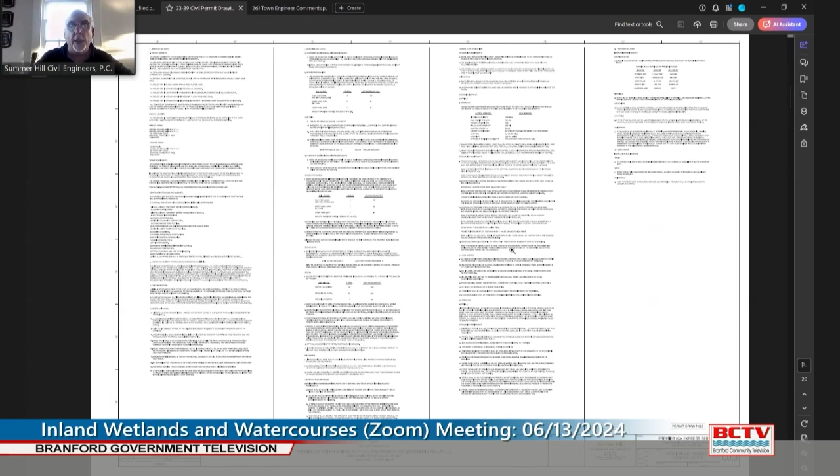Okay, so there are two changes to the plans. I'm going to zoom in a bit here. And both have to do with the stormwater infiltration systems.

Regarding the two stormwater treatment structures, one here and one here, we received information from the manufacturer that we had requested, and we simply changed the model number of the stormwater treatment structure, same manufacturer, same type. We just changed the model number on the drawings and the appropriate detail to make sure it had the correct internal capacity to bypass flows greater than the water quality flow. So the only changes are the model number and the detail shown on the drawings. The detail looks exactly the same, just different dimensions, a different model number.

The other change, and this is more significant, is that we did a couple things. We moved both stormwater infiltration systems further back away from the wetland, more towards Route 95. We did that as I was reading the new stormwater quality manual and noticed they had a requirement, or guidance, that stormwater infiltration systems should be a minimum of 50 feet from an inland wetland.

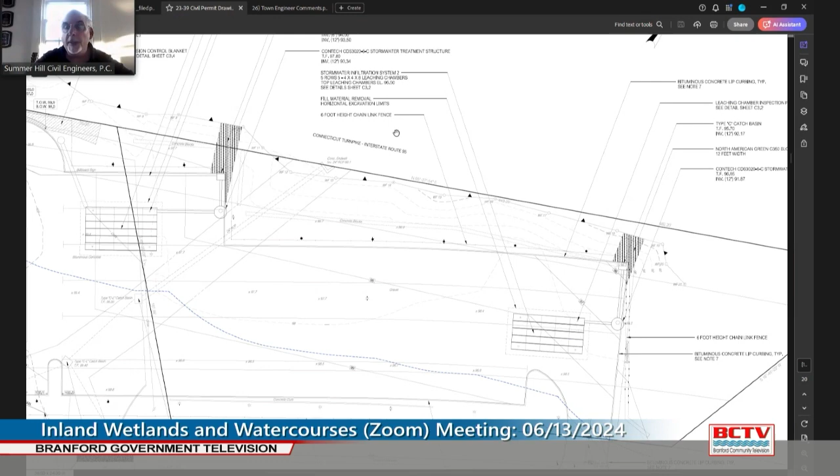So we did that. And the other probably most important thing we did is we called for, on the plans, removal of the fill material. If you recall, this site has been historically filled. We decided to call for the removal of the fill material within the limits of the stormwater infiltration systems, and the replacement of that fill material with a granular material that meets a certain infiltration rate.

And on our drawings, in the details, I'll see if I can switch to that sheet. Hopefully you'll be able to see the switch. Can the commission see now on my screen a typical section through the stormwater infiltration system? Yes, thank you. So we called for, on the plans, both in plan view and here in the details...

...the removal of the fill material, as observed by the project engineer in the field, and the replacement of it with the proper material, and the field testing of the in-place material by a specified infiltration test method to ensure that after placement of the fill, we have achieved the design infiltration rate for the systems. That applies to both infiltration systems.

So those... Excuse the interruption. This is Commissioner Bassermann. Is that because of recent changes in the stormwater manual guidance, or is there some other reason? Because for some time now we've talked about that broken up concrete, etc., as not being a problem.

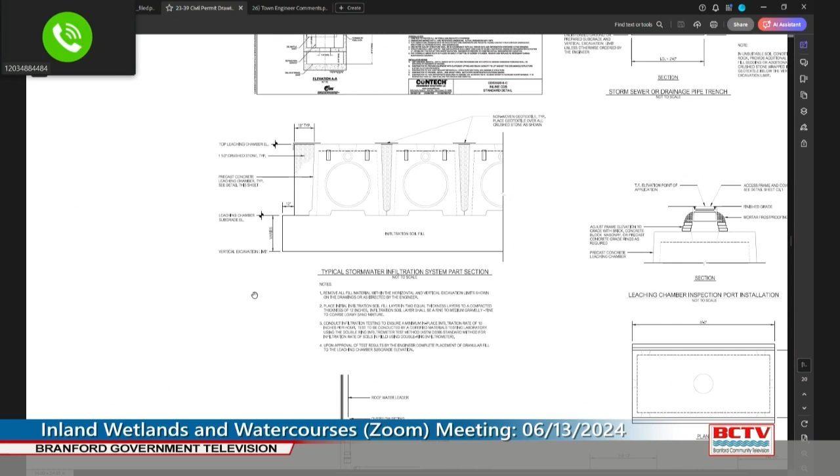So all of this removal would be observed, of course, by town staff, but it'll certainly be observed by the project engineer, and also the placement and the infiltration testing will be observed by the project engineer. We called for the infiltration testing to be done by a certified materials testing laboratory, in other words, an independent laboratory would perform the field infiltration test. You can see that note 3 here, which I zoomed in on.

So those are the... And that infiltration rate of 10 inches per hour, was that the same prior to the most recent change in stormwater management? Yes, that's the design infiltration rate that we designed for, knowing of course that when you have debris, the rate would be much higher. So by leaving the debris fill out, we were conservatively designed.

And Matt, I know Jamie would like to say something, but I just wanted to offer -- Matt, if the commission has any questions of Matt, again, he is here also.

This is Commissioner Begemann. So there was no perc testing on this site, correct? I mean, there were some test pits, but there was no perc testing done because of the nature of the material. And so now what we're getting is you're actually testing the area where the stormwater is going to go once that fill material has been put in, so you know that it works. Correct, that's correct. Yes, ma'am. Yep, thanks.

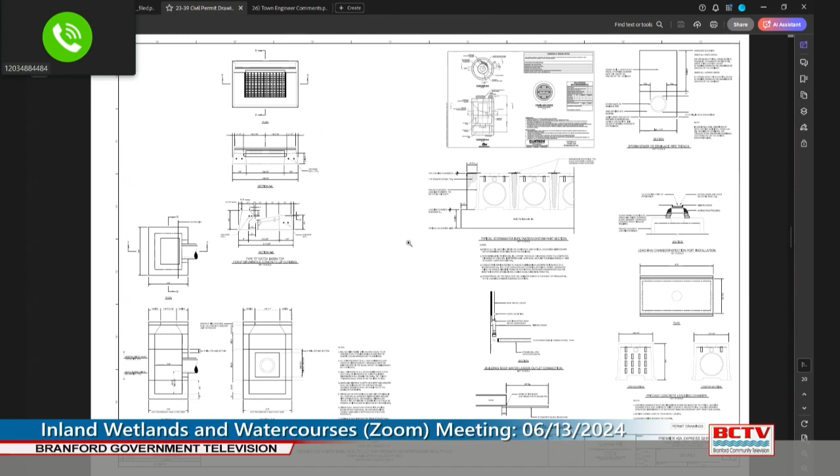So those are the two changes. I think, as Jamie said, we've addressed all the comments that pertain to your commission and this application. I think the only thing that Jamie suggested I speak about is the comparison of the peak rates of discharge of stormwater runoff, and I can do that now if the commission is okay with the changes to the plans.

So why don't we do that? Okay, so I will bring up -- just bear with me one second -- I'll see if I can bring up the revised summary. Okay, I think I have it here.

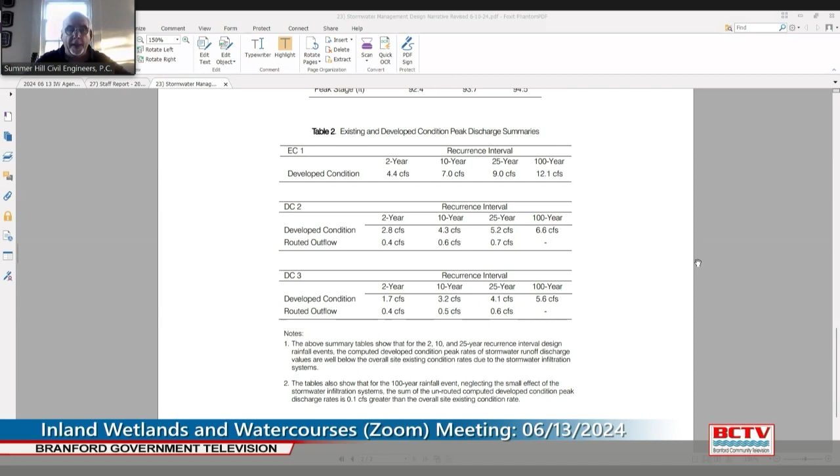So if you, I don't know if the commission can see these numbers, but in the existing condition today, you can see in the first table the peak rate, the computed peak rates of stormwater runoff. They range from 4.4 to 12.1.

In the developed condition, as we've noted in our summary in the narrative portion, the major portion of the site gets directed to the two stormwater infiltration systems. And the results of the hydrologic routing of the stormwater through those systems are shown in the next two tables, DC2 and DC3.

And you can see the difference in the peak discharge rates. If you look at the routed outflow row in each column, you can see how low they are. So for instance, for the...

25-year storm, which is what the systems are designed for, the DC2 system, the inflow to the system in the developed condition is 5.2 CFS.

The routed outflow, because of the exfiltration or infiltration of the stormwater runoff into the underlying soils, is 0.7 CFS. And if you remember, the systems are designed to completely temporarily store it.

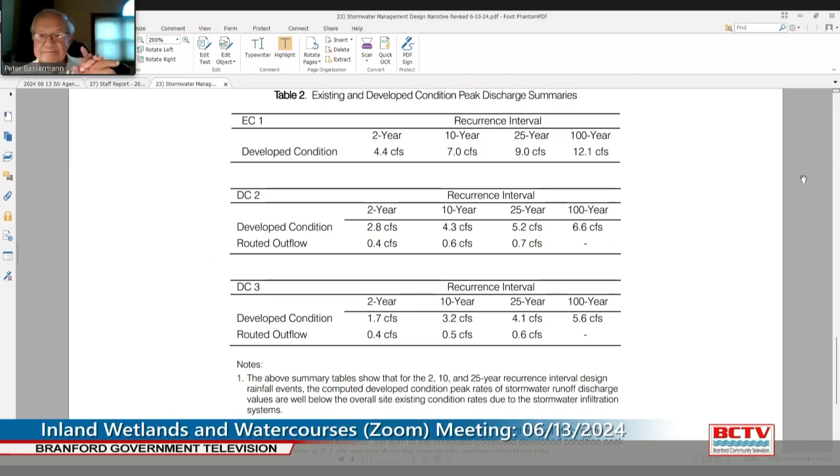This is Commissioner Begemann. There was something in the more recent material about the overflow. What happens to the overflow of more than a 25-year storm? Can you just explain what happens to that, Mister?

Yes, we talked about that at the last meeting. We provided for the safe conveyance of overflow during the 100-year event, or an event greater than the 25-year, down the slope by reinforcing the slope.

If you remember, with permanent turf reinforcement mats.

If you recall, that's been on the plans for a couple of revisions now. We discussed it at the last meeting. Yes, I recall now. Thank you, Commissioner Begemann.

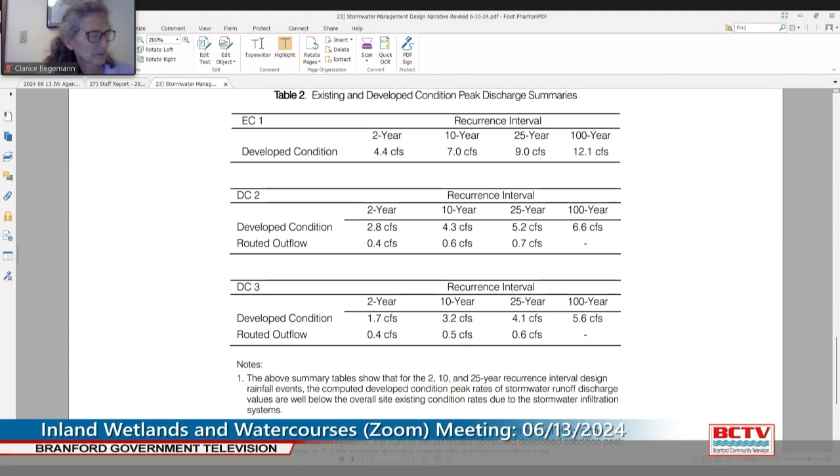Any other changes that you wish to comment on, sir? No, Mr. Chairman.

This is Commissioner Bassermann. Any other comments from the commission, either as a result of the review that we just heard, or is it at this point timely to go through the staff report, especially the conditions for consideration?

Jamie, this is Commissioner Bassermann. Typically, I know you've gone through line by line with the staff report. The fact that this is available and was mailed out, etc. Can we circumvent that, or is process going to dictate here that we need to verbalize the potential conditions?

Jaymie Frederick, the Wetland Agent: I think generally speaking, the commission at least kind of reads through the conditions for consideration. And I think when the report was available and commissioners' ability to review it in advance dictates whether the whole report's gone through or not.

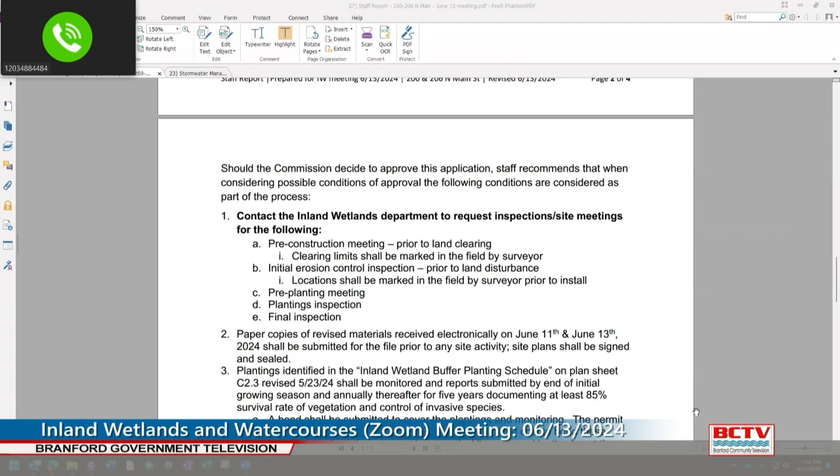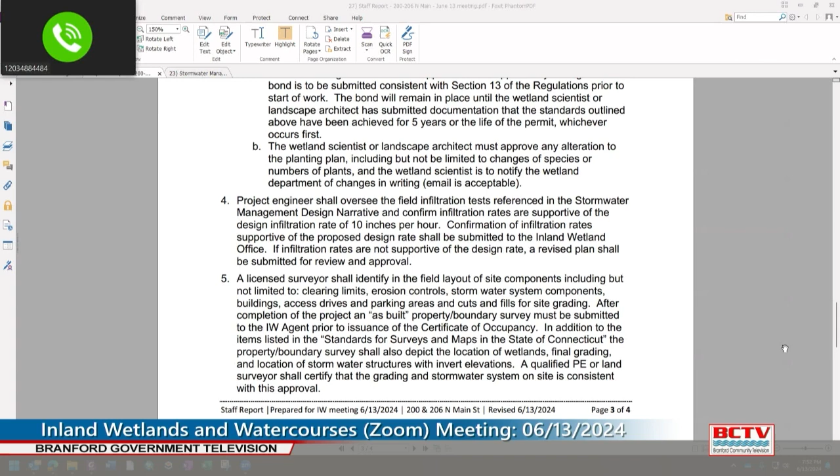This is Commissioner Begeman. I'll make a motion that we approve Inland Wetlands 240401, 200 and 206 North Main Street, the new service building for Premier Kia, with the staff report prepared for tonight's meeting 6/13/24, with the suggested conditions and all of the standard provisions and standard conditions and general provisions of all permits.

Commissioner Bassermann: Is there a second to Commissioner Begeman's motion? Commissioner Gopowski: I second that. Any further discussion or amendments to the motion? All right, we'll take a vote on that motion.

Commissioner Ormrod, aye. Commissioner Papantonis, aye. Commissioner Begeman, aye. Commissioner Gopowski, aye. Commissioner Bassermann, aye.

All right. Good luck. Thank you very much.

Next up, under application for review, Inland Wetland 2403, 22 Howard Avenue. This is the replacement of a crumbling retaining wall. Any updates, Jaymie, on this?

Jaymie Frederick, the Wetland Agent: At the last meeting, the commission reviewed this for the first time, subsequent to authorization from the abutting property owner, which was required for access and erosion controls related to the construction activities. At that meeting, the commission wanted more information on the process of removing the wall, and the site plan to be readdressed to clarify some of the erosion control notes and add the stockpile location and approximate location of the offsite wetland/watercourse.

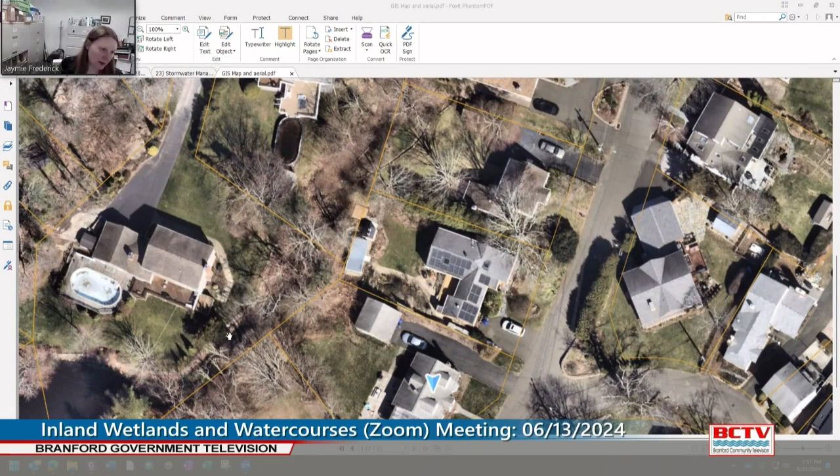And then there's a watercourse that flows northeasterly. It's kind of hard to tell where it is through here, but it is definitely off of the subject property. The property owner did show me the pin for the corner of the property, which does appear to pretty much align with the approximate property line shown on this map. And then the watercourse continues in this direction. And then I'm just going to slide down to an aerial image from March of this year. It shows in a little bit more detail, but I don't have contours available on this map.

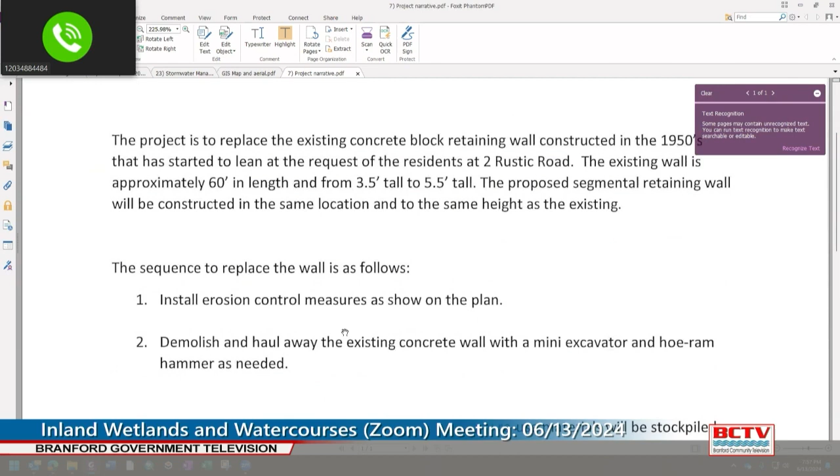Essentially, install erosion controls, demolish and haul away the existing concrete wall with a mini excavator and hoe ram hammer as needed. Remove and haul off materials behind the wall. Any reuse materials will be stockpiled on the driveway of 22 Howard, surrounded by hay bales as shown on the plan.

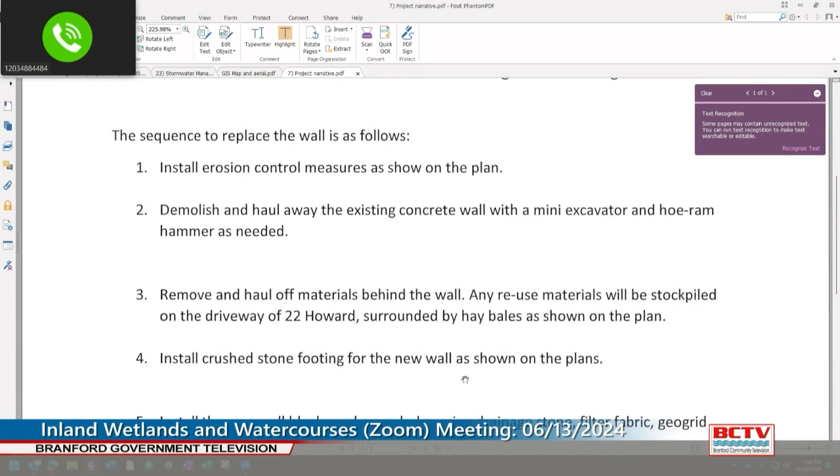Install crushed stone footing for the new wall as shown on plans. Install new wall blocks and weep holes using drainage stone, filter fabric, geogrid, and fill per plan. Grade and repair the area at the bottom of the wall using crushed stone or materials approved by the neighbor. Grade the area at the top of the wall.

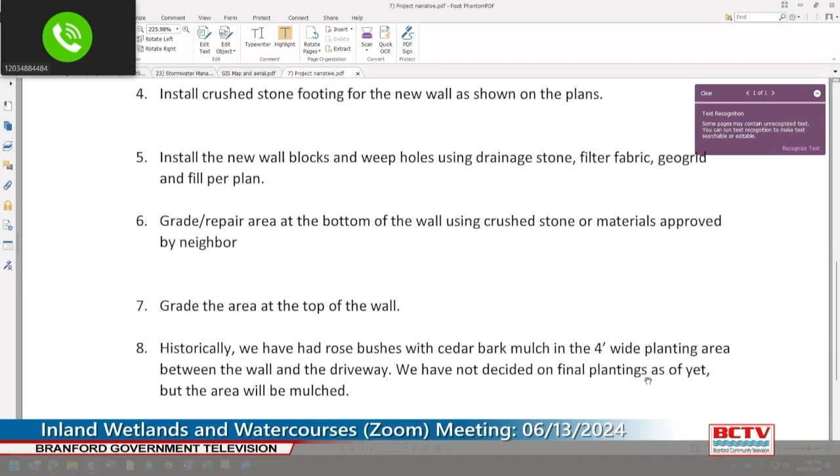Historically, we have had rose bushes with cedar bark mulch in the 4-foot wide planting area between the wall and the driveway. We have not decided final plantings as of yet, but the area will be mulched.

So I think that last section is in response to this area in between the driveway and the wall. And then the crushed stone or other materials approved by neighbor is for any area that is disturbed below the wall while the construction work is occurring. And I do have a general condition that can be considered to further codify that the area needs to be stabilized at the end of the project.

Commissioner Bassermann: Jaymie, a number of those items said 'per plan.' Do we have the details, for instance, the before grade and the after grade? We don't have a grading plan.

My understanding is that the wall is to be replaced and the finished grade is predominantly to remain as is, but I would defer to the applicant to clarify if that is correct or if I am incorrectly representing the intent.

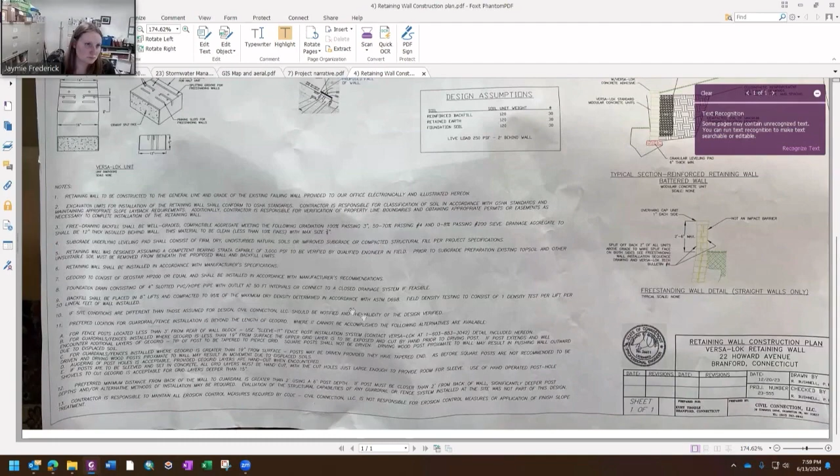Commissioner Bassermann: Can you put back the sheet that you had up before the detailed sheet? That one, yeah.

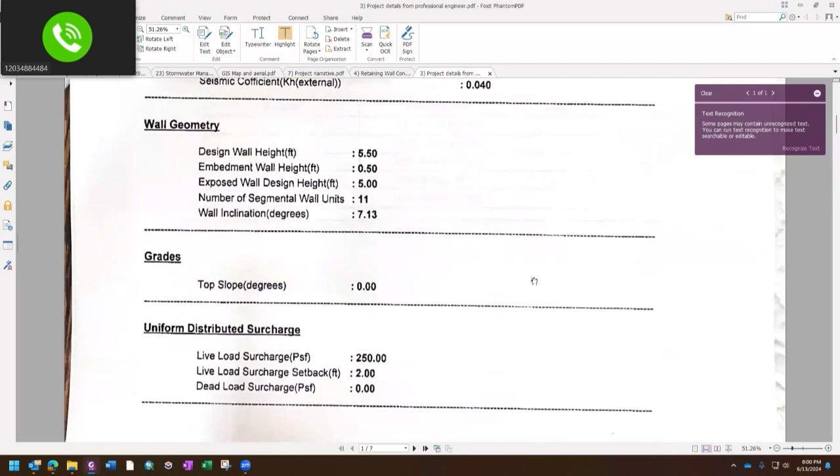Do we have detail regarding the filter fabric and the geogrid and all that, or is this what we have? Jaymie Frederick, the wetland agent: there's this plan, and then there's also the fact that the wall is of a height where it requires a building permit, which requires an engineered plan. So we have the specific calculations regarding the height of the wall, and loads, and the geogrid type and number.

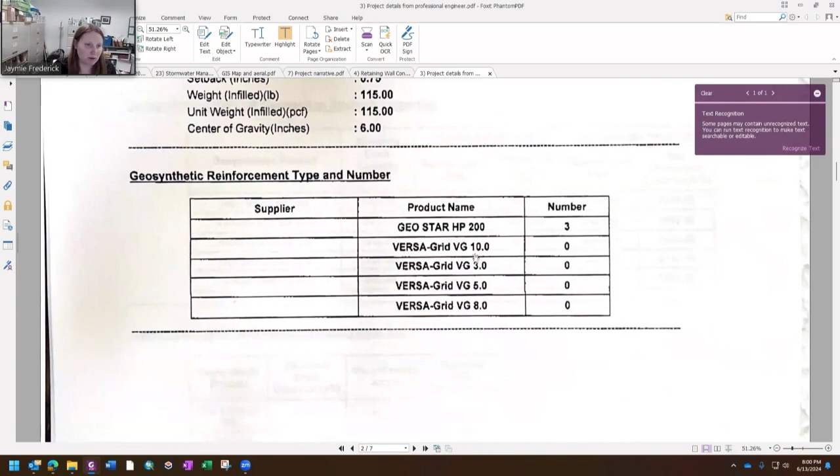Commissioner Bassermann: Have the town engineers reviewed this and signed off or not? I believe so. There was a building permit application submitted, which I believe all departments except for inland wetlands at this point have signed off on. So I believe all other departments are satisfied at this time.

Commissioner Gopowski: I know this is probably going to sound like a redundant question, but is there approval from the neighbor on file for this work to commence? There's authorization, and I believe the neighbor is present this evening.

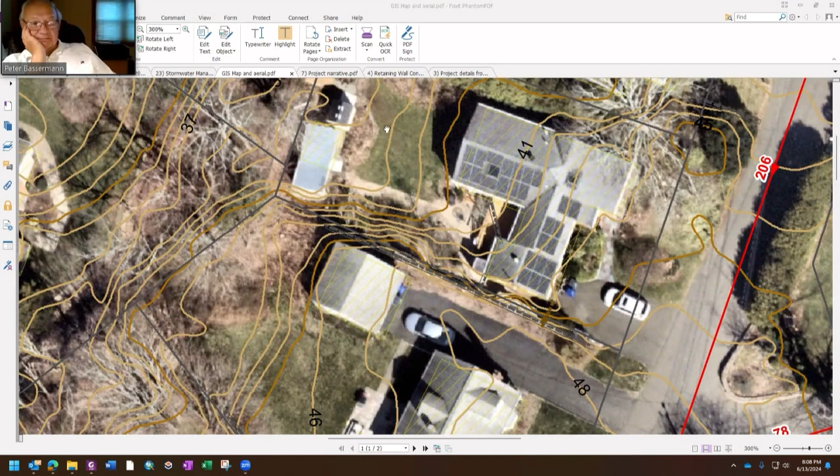Okay, got it. And can we post the staff report?

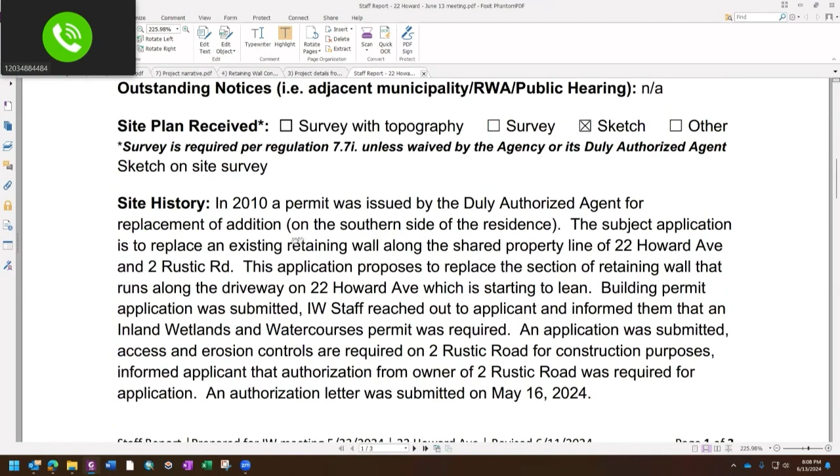Is this for this application or the last one? Last. Okay, so we went over that history last time, so I don't think we need to do it again.

I did add here that I've been out to both sites now, and I estimate the wetland to be about 50 feet or more from the closest point of the wall replacement and the direction that water would flow. Erosion controls.

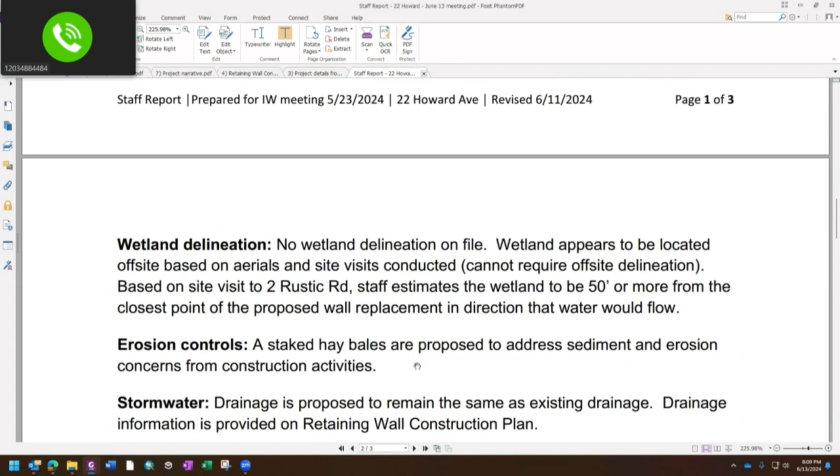Stay, more like 70 feet. I'm sorry? It's more like 70 feet from the beginning of the wall. It's 50 feet from the beginning of the wall back to the property corner, and then another 20 plus or minus to the water course. Now the wetlands is a whole different matter, since they're not delineated, we don't know about that. Right, I was being conservative with my 50 feet estimate.

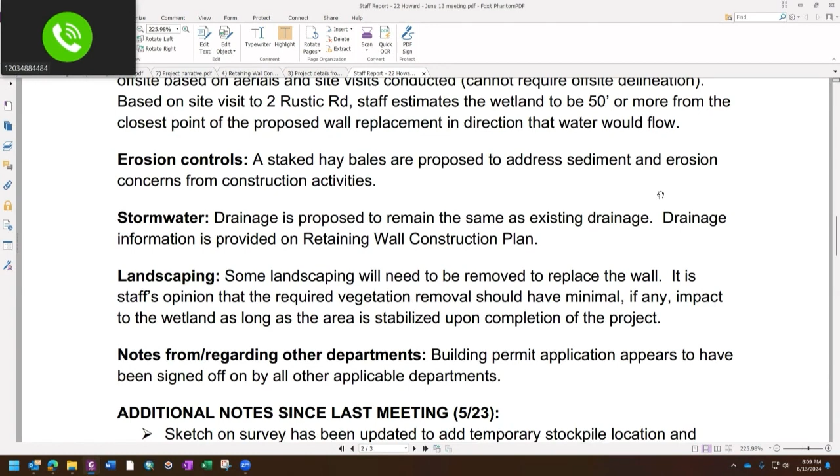Stormwater drainage is proposed to remain the same as existing drainage. Drainage information is provided on the retaining wall construction plan. Landscaping will need to be removed to replace the wall. It is staff's opinion that the required vegetation removal should have minimal, if any, impact on the wetland, as long as the area is stabilized upon completion of the project. There will be no canopy removed that would be shading that wetland area. Building permit application appears to have been signed off by all applicable departments.

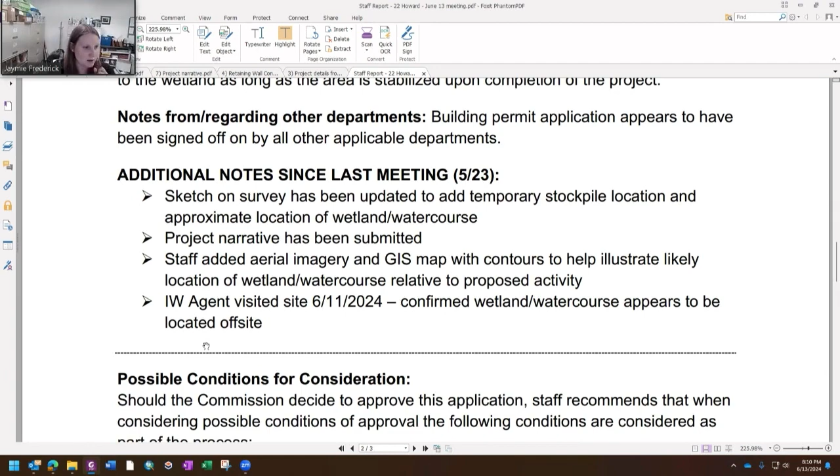Some notes since the last meeting: the sketch on survey has been updated to add the temporary stockpile location and approximate location of the wetland and watercourse. I haven't shown that yet, I can if you want. Project narrative has been submitted. We've looked at that, we've looked at the aerial imagery, and we've gone over the fact that I've been out to the site.

So this is Commissioner Bassermann. Jaymie, we're removing a wall here, correct? There's a wall that's proposed to be removed and replaced.

Like for like? The same materials? No, better. The existing wall is a cinder block wall that will be replaced by a Versalock wall, more modern. But essentially the same kind of material. Okay, same place, same height, same everything. Yes. Got it.

Okay. Anything else, Jaymie? Did we go over all the possible conditions? Not yet, considerations?

So recommended considerations for conditions would be inspections for initial erosion controls. Clarification, erosion controls shall be located as close to activity as possible, considering existing conditions, ledge, and construction access needs. Two, hay bales shall be installed in accordance with the CT guidelines for soil erosion and sediment control.

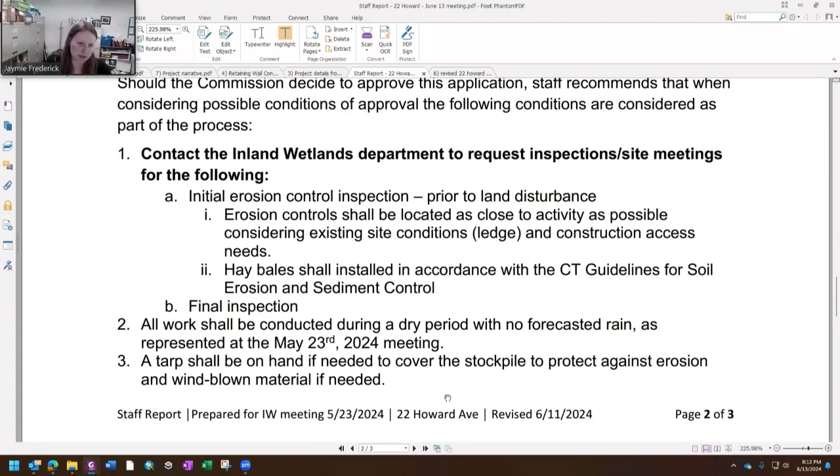And a final inspection. Two, all work shall be conducted during a dry period with no forecasted rain, as represented at the May 23rd, 2024 meeting. And three, a tarp shall be on hand if needed to cover the stockpile to protect against erosion and windblown material if needed. And then four, any bare soil areas from construction activities shall be stabilized with vegetation, crushed stone, or other measures approved by the duly authorized agent, and the standard conditions and general provisions of all permits.

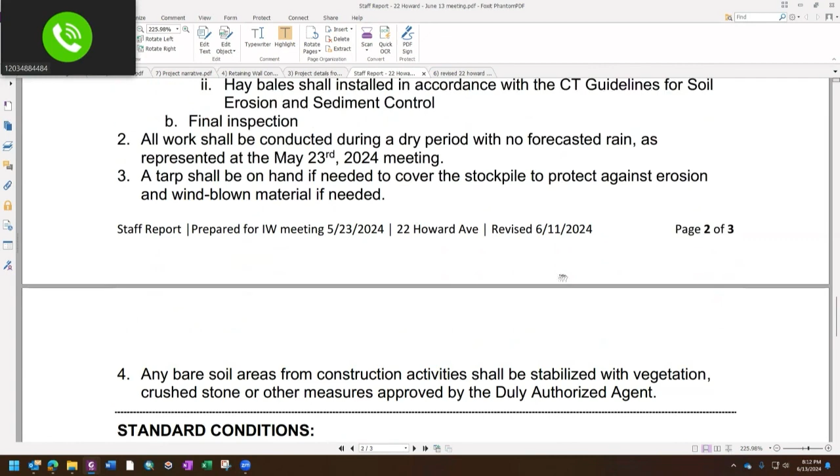This is Commissioner Bassermann. Do we have a sense of how long the activity is to remove and replace the wall? It's estimated at 5 days.

This is Commissioner Begeman. That terminology that's used for grading of the areas at the top of the wall and the bottom of the wall, I wonder if the grading is really just to maintain the current slopes, correct? The current grades. So the grading you're doing sounds like it's minimal. It's where you had to dig up a little bit to get at the base of the wall and then put in the fill to get back up to that same line, etc. Absolutely minimal. At the top of the wall, we're going to grade back to the driveway, away from the neighbor's property. And at the base of the wall, we'll grade back from her foundation to the wall. Yeah, thank you.

Commissioner Bassermann: Does any commissioner feel that we need to augment the potential considerations with any other control measures?

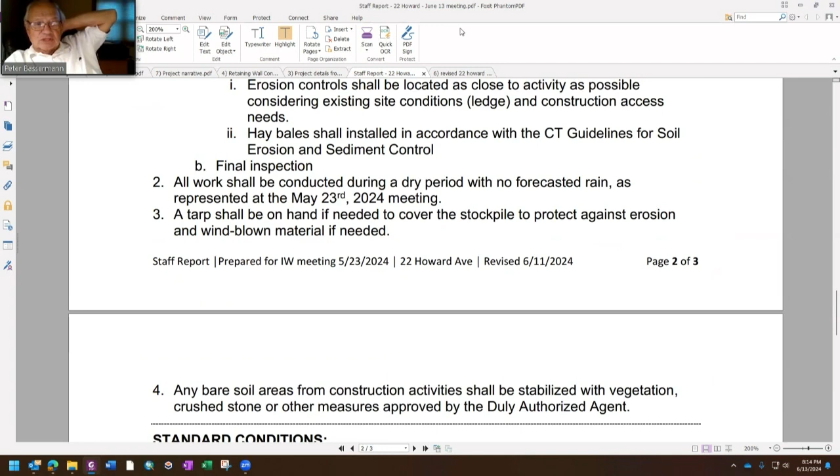It's Commissioner Bassermann. Jamie, do we have, as part of the standard conditions, when the erosion controls can be removed? Or is that included in some? So usually that's kind of addressed at the final inspection, but we do have under the standard conditions, erosion controls are to be removed and properly disposed of once earth is stable. And stability is affirmed by staff? Yes. Okay, thank you.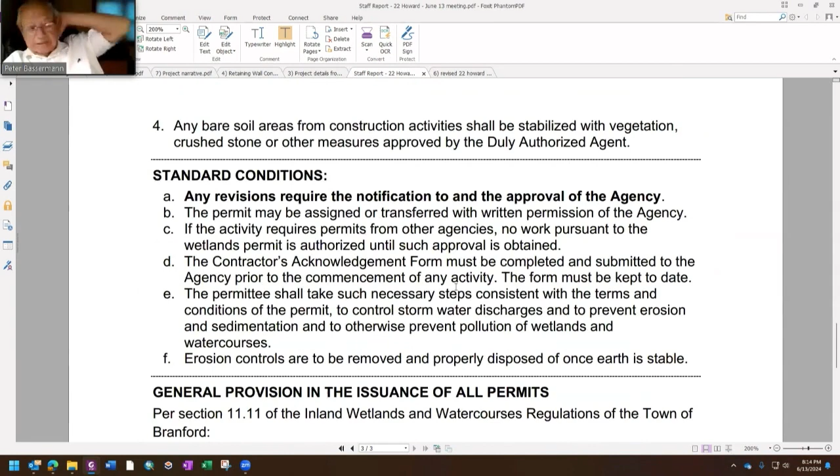Anybody want to make a motion regarding 40303? May I say something for a second, please? Is it possible? Sure, make it brief, please. I'd be glad to.

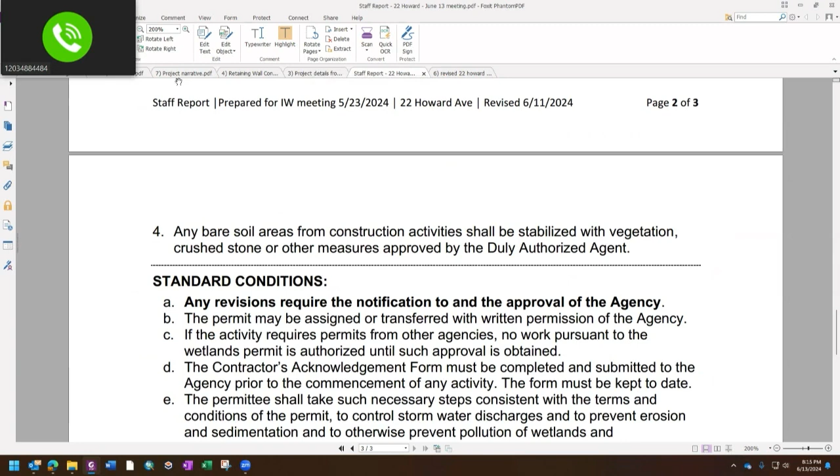I would respectfully ask, Jaymie, would you please put up the aerial image you had of the property where the water is flowing in that area? Okay, thank you. I do want to say something that is not evident on this, and that is that our property is significantly lower than that of 22 Howard Avenue. Just because of all, if you can see all of this, I'm assuming that these gold colored lines are where water is flowing in the area.

Is that true? No, the lines are showing the elevations. So basically, each line is showing a foot step down. Okay, that's helpful as well. Okay, so you can see how much lower our property is.

I did also want to say to the Inland Wetland Commission that I would love to have you come out and take a look at all of this, because two-thirds of our back property floods when we have these torrential downpours that we've been having, which are so incongruent with usual weather. Our entire backyard will be marshland, and there'll be water, much more water than we've ever had, as a backup from that waterway that flows through our property and down into our neighbor Al Lang's property.

So I would love for, and also I would love the commission, for instance, Commissioner Bassermann, with all due respect, if you could come out sometime, or somebody could come out with Jaymie, and take a look at this situation and also what's been caused by the activity across the street from us, because it's directly impacting our property. And I think it is inland wetland property at this point. That whole area of the neighborhood is. And also, our property, you can see on the aerial, is set back quite a ways from the Troidal's property, the 22 Howard Avenue.

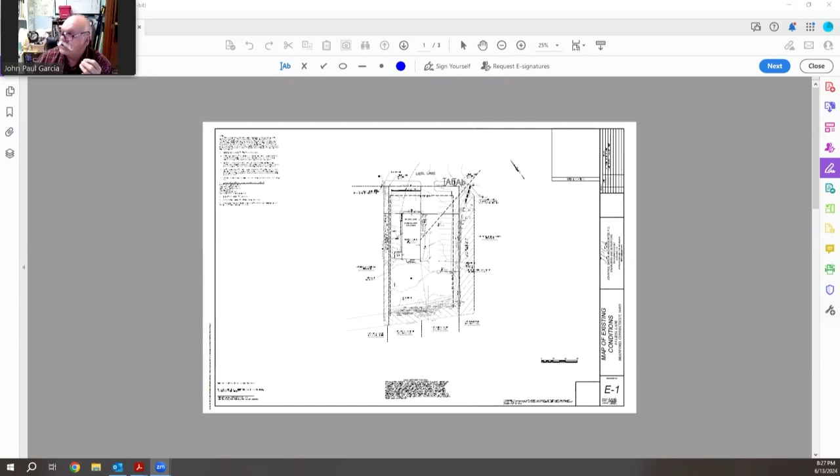For the record, my name is John Paul Garcia. I'm a licensed professional engineer, land surveyor, licensed to practice in the state of Connecticut, office in 190 Fairwood Road, the town of Bethany. I'm here representing the owner of 4 Liesl Lane. This is an existing 0.6 acre site south of Liesl Lane at the end of a turnaround. It presently has an existing metal building on it.

The site at present, I'm going to blow this up just a little, is approximately half paved. And the back part of the site, can you see my cursor? Yes. Okay, the back side is gravel. There is a drainage swale along the south side, along the east side, and there is a drainage easement to the town on the west side.

What they're proposing to do is repave the existing front of the property and add new pavement to the rear of the property. This is sheet S1. For stormwater management, we have been in touch with the town engineer, and we have installed an underground system, a conventional infiltrator system that's designed to attenuate the 2, 10, 25, and 100-year storms, and then retain and treat the water quality volume, which is the first 1 inch, which is approximately 90% of the storms.

The overflow from that heads to the east into a level spreader into the wetland. We pick up some new drainage from the roof, and we tie that into the existing catch basins. We put in some new catch basins, so everything is upgraded. At present, there is no water treatment on site.

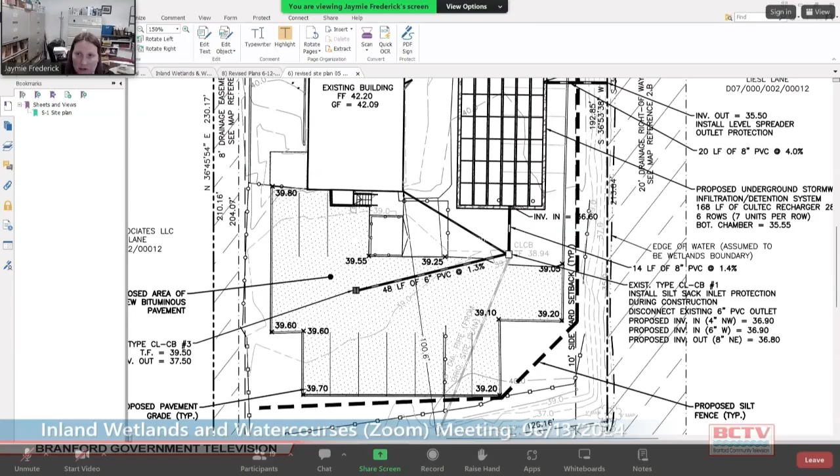Yeah, the 6/12 didn't have the spot elevations. I don't know why, but the 6/12 rendition didn't have the spots turned back on. But yes, the idea is for all the new pavement to drain into that catch basin - CB3, just above where the cursor is. That's correct. So the top of frame for the catch basin is 39.5 feet.

And you can kind of circle around it and see that the exterior portions of the proposed parking area are higher than that. Maybe not over here, but this one's going to this catch basin. Oh, I see, he left the top frame of that one off too. Okay, oh wait, no, it's here - I'll fix that. It's existing at 38.94.

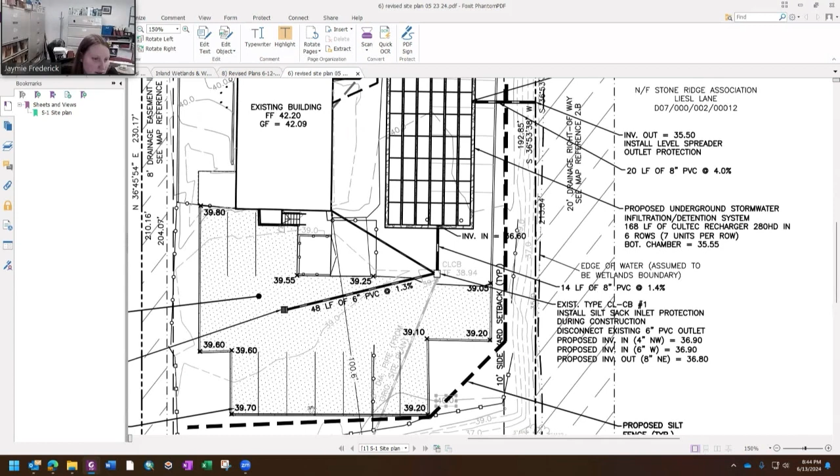It's right there, yeah, so this area pitches to this catch basin. Correct. And this area pitches to this catch basin. Correct. And then the upper area pitches to the other basin. Right.

Commissioner Bassermann: Where does it drain to? Is it only one that drains to the wetland, or is everything drained? There's only one outlet. The current condition is just 2 catch basins which discharge directly to the wetland, and the proposed condition is to abandon those pipes, leave them in place, and have the system overflow discharge in one location to the wetland. Do we know what the velocity of that discharge is, Jaymie?

I would defer, I'll be honest with you. It's probably on the order of one CFS or 2 CFS. I'd have to go back and check the discharge, but it's not discharging at any great velocity. These don't come out of here at rapid speed.

Those calculations are somewhere in the material? Yes, there's a complete set of drainage calculations that was reviewed by the town engineer. He had a couple of comments, we made them and sent them back. So there is a complete stormwater report on file.

Commissioner Bassermann: Jaymie, have you been able to go through that report and are satisfied with the calculations? Jaymie Frederick, wetland agent: I have reviewed it and am satisfied to my extent of review. And then the town engineer has also reviewed it, who has much more experience and expertise in reviewing those types of documents.

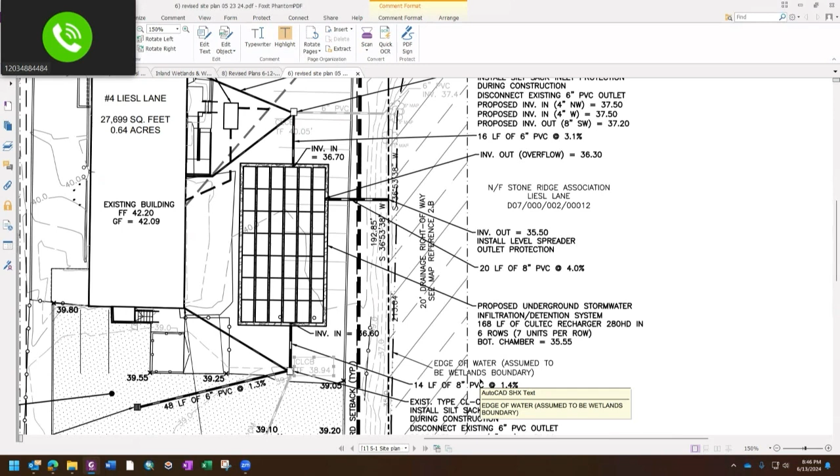Commissioner Begeman: So for the outfall, Jaymie, whatever comes out of the level spreader before it goes into the wetlands, what is placed on the earth there where that water comes out? Is there riprap? Riprap, I don't... there's a detail on this third sheet. Okay, because I don't see it. Of the set. Thank you.

8-inch depth minimum riprap over 1 layer filter fabric, 4 feet out and 4 feet wide at the further end of the outlet.

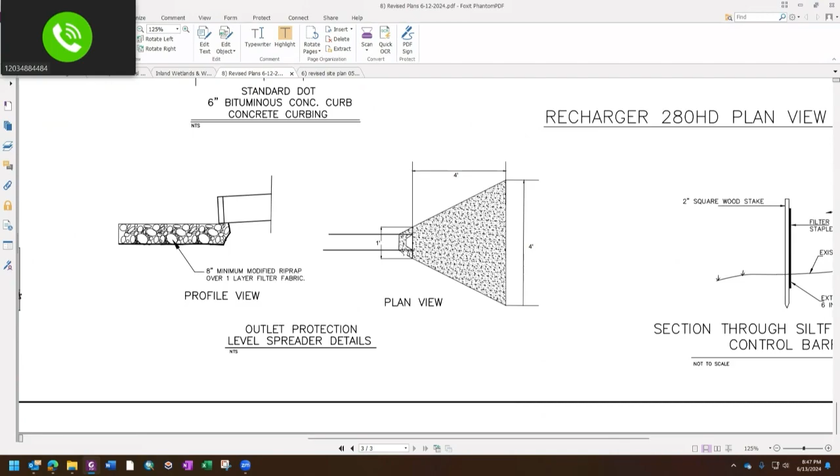Commissioner Ormrod: Is there any proposed vegetation removal along that eastern boundary where the silt fence, level spreader, and outlet protection are being installed? No, there's a fence along the south and west side, and then the east side just slopes off. There are some pieces of fence, but there's no intention to clear that slope at all.

Jaymie Frederick, the wetland agent: I didn't specifically inspect the location where the outlet would be. There might be some minor vegetation that would have to be removed, but nothing significant. The significant trees are shown on the drawing. Nothing in that area. I think we located every tree over 4 to 6 inches.

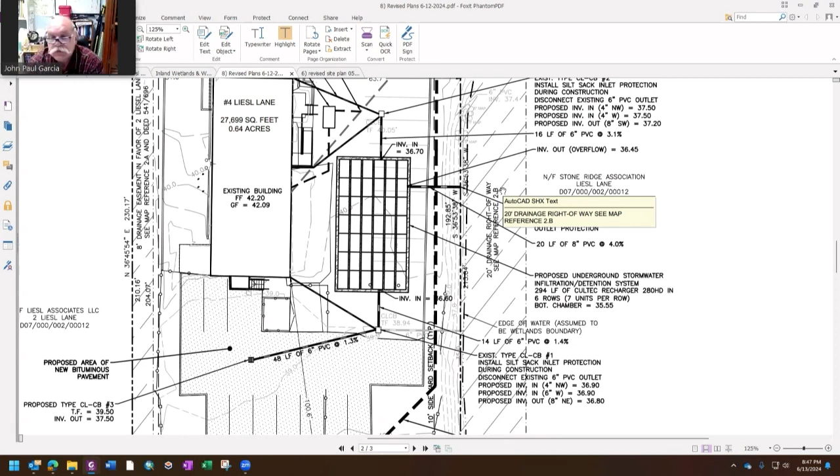Any other questions from the commission? I see we have a hand raised from Mr. Demore. Yes, good evening, I'm Ted Demore, 94 Ayers Point Road, Old Saybrook. I'm the architect for the project.

There was a question about the zoning and the lot coverage. The lot coverage allowed is 60%, and we are at 59%. We're not seeking any variances.

You squeaked by there, Mr. Begman. Great, it was planned. Yeah. Really? Thank you.

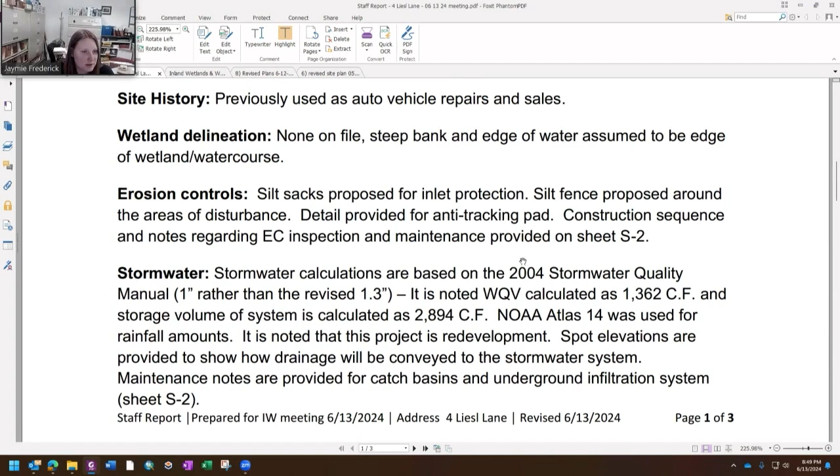Jaymie, you want to post the staff report? So Jaymie Frederick, the wetland agent: we already went over the stormwater area notes, the fact there's a silt fence proposed along the limits of disturbance. They do have an anti-tracking pad detail, and a construction sequence has been provided along with the notes regarding erosion control inspections and maintenance on sheet S-2.

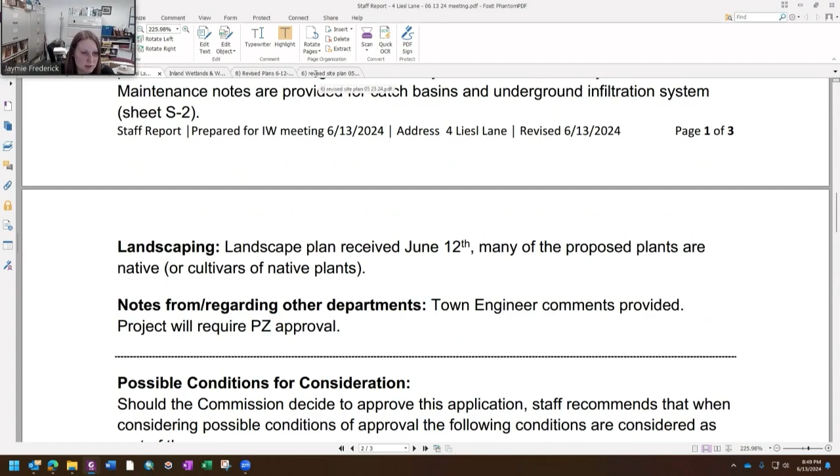Landscaping: a landscape plan was received yesterday. Many of the plants proposed are native. To the comment made earlier, there shouldn't really be much impact to any vegetation beyond where there's an existing fence line, pretty much either where the silt fence is proposed or beyond it. The only area where I think there might be a little bit of impact is in the installation of the outlet.

I can pull up that landscape plan if the commission wants to see it. It's primarily to address the zoning requirements. Notes regarding the town engineer: he has provided comments, and the project will require planning and zoning approval.

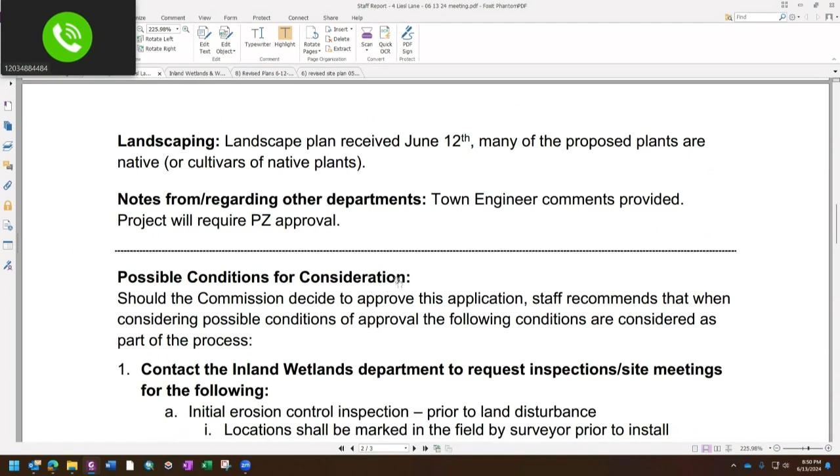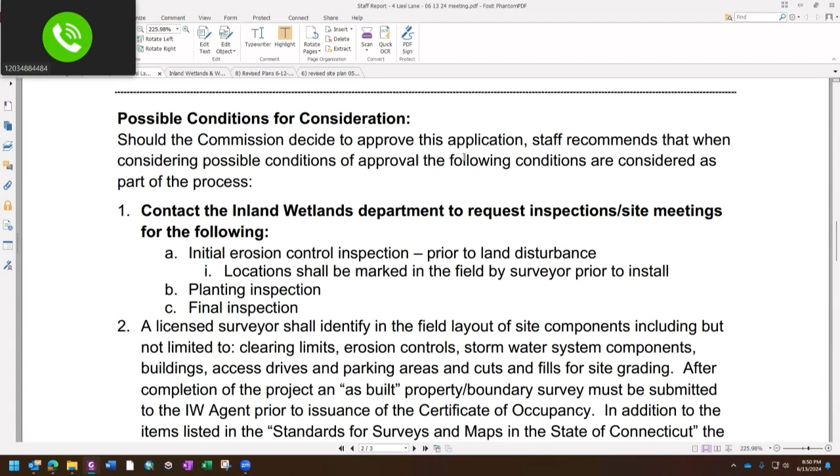Conditions for consideration include initial erosion control inspection, planting inspection, and final inspection. Everything should be marked out in the field by a surveyor, and final certification upon completion of the project for grading and stormwater compliance.

Site plan revisions to address the location of the oil water separator, as may be required by other departments or agencies, can be reviewed by the duly authorized agent. I added that based on one of the town engineer's comments, since it sounds like he would like to have it potentially relocated. That type of activity really shouldn't have any impact on the wetlands, so I didn't think it needed to come back to the commission.

If the commission thought it was important that those spot elevations be copied over to the latest plan, that could be a requirement. One thing I realized I omitted is I would suggest the commission also require paper copies of the materials submitted electronically on June 12th. Let me just make sure that date's correct. Yes, June 12th, be submitted for the file prior to the start of site activity. Be more than happy to.

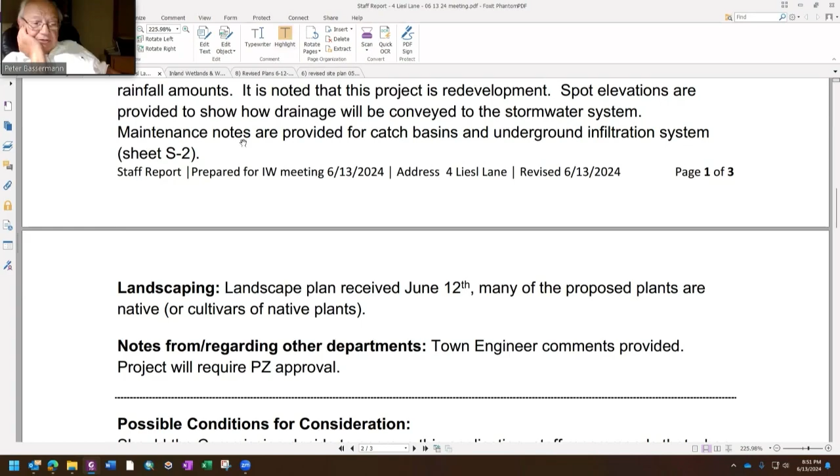Jaymie, this is Commissioner Bassermann, can you post the possible conditions for consideration? Scroll up. Now, the licensed surveyor on item 2.

Does all of the areas in terms of the erosion control, stormwater, and all of that - are you reviewing that? I'm not seeing an item 2 where the inland wetland agent... oh wait a minute, it must be submitted prior to the issuance. Okay, all right.

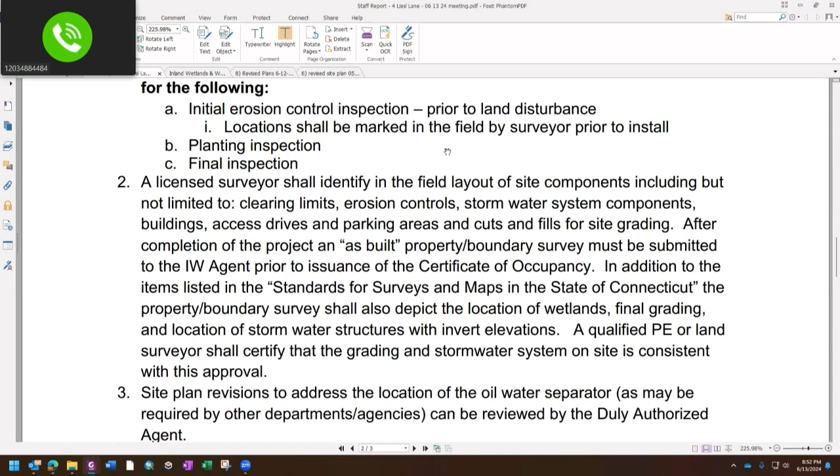Oh yeah, that's relative to the comment on the oil water separator. Where item 2 ties into inland wetland agent inspections is under the erosion control inspection, where I put the call-out for the location to be marked in the field by the surveyor prior to installation. I'm usually predominantly looking at limits of disturbance and limits of clearing when I go out to the site. The condition of everything else being marked out is in the interest of making sure that what was approved gets implemented, with no problems along or at the end of the project. The final certification being submitted documents that they have gone through that process. Completed it. Yeah, okay.

Is there anything else outstanding from the commission on 240403? Are we ready for a motion?

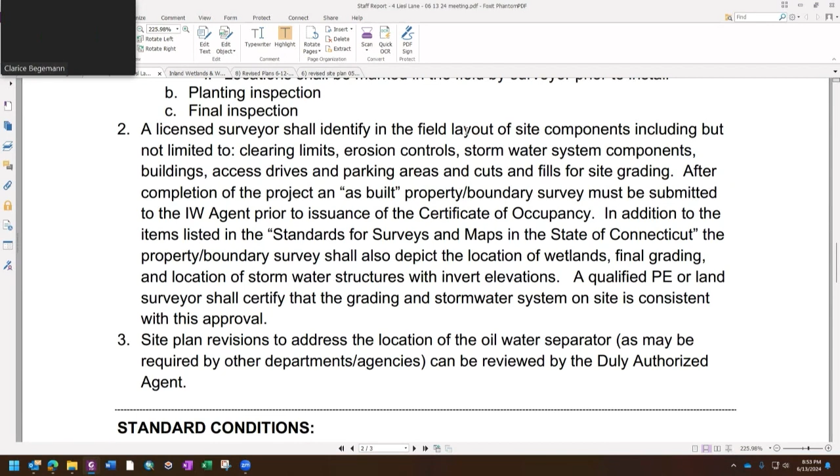This is Commissioner Begemann. I'll make a motion that we approve Inland Wetlands 240403 for Liesl Lane site improvements due to a change in use, that we add 2 conditions to the possible conditions for consideration in the staff report revised 6/13/24: number 4, that paper copies of material submitted on 6/12/24 be submitted to the office, and number 5, that a new site plan with site elevations be submitted, along with the standard conditions and general provisions of all permits.

Sounds like a complete motion. Does somebody want to second that? Commissioner Goklowski, I second that motion. Does anybody have a friendly amendment to that motion?

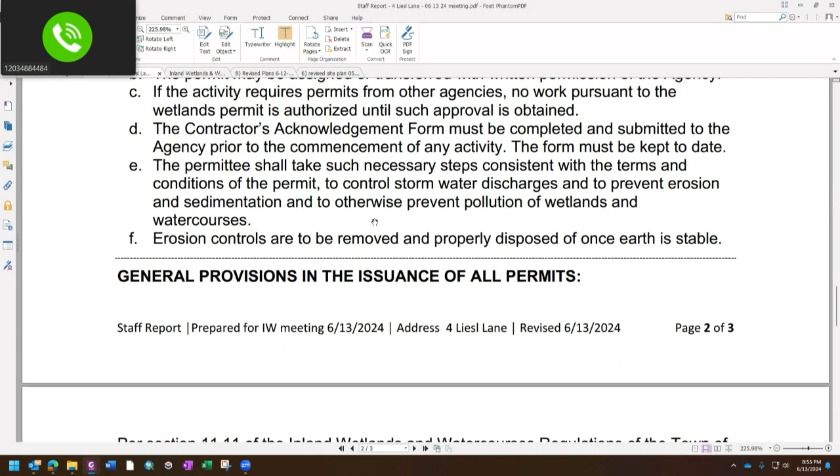All right, we'll take a vote. Commissioner Goklowski, aye. Commissioner Begemann, aye. Commissioner Meinson, aye. Commissioner Begemann already said aye, but I'll say aye again. I don't see everybody on the participant list. Commissioner Armstrong, aye. Commissioner Papatonis, aye. Commissioner Basserman, aye. All right, I think we're good to go here.

Thank you. Thank you. Thank you.

We have the applicant here. Jaymie, anything to update on this one before we turn it over to the applicant? This application was received at the last meeting, so this is the first meeting where the commission will receive our presentation. I have provided some initial comments to the applicant, and we're still looking to get comments from the town engineer. I have not had a chance to draft a staff report for this application at this time. However, the general content I would expect to see has been submitted, so I think it makes sense to move forward with the presentation.

Okay, the floor is yours. Is it Mr. Houle? Thank you very much. My name is Tim Houle. I am a civil engineer, the engineer of record for this project from BL Companies. We are also the architect of record. I'm here to represent our client and applicant, Faulkner Island Development. They are looking to develop 1201 West Main Street. If it's okay, I will share my screen now so we can walk through the project a little bit.

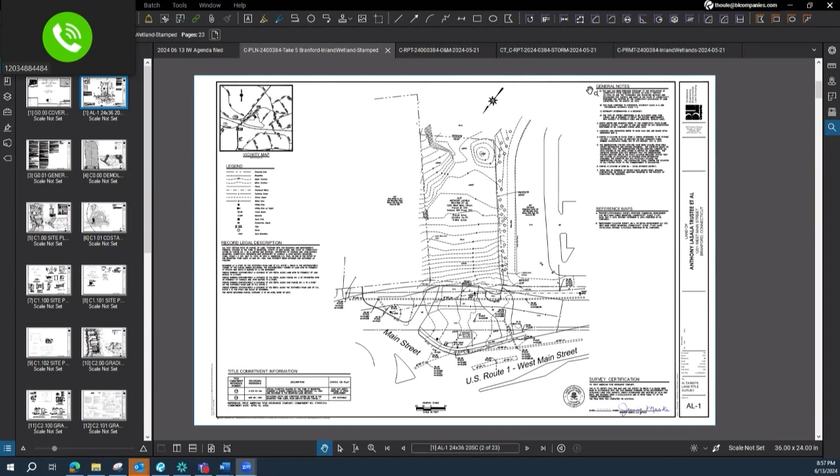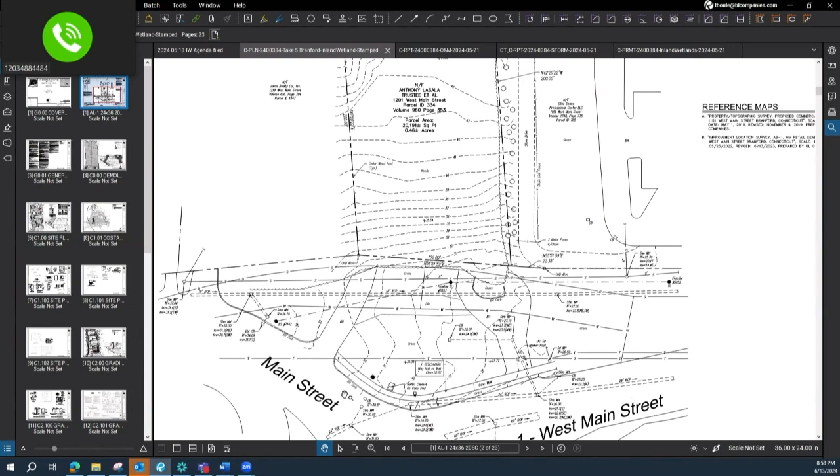I'll move forward quickly to the survey. For frame of reference, West Main Street and Main Street are on the bottom of the plan sheet, so north points toward the bottom left-hand corner. The site is pretty small, just under half an acre, plus or minus 0.46 acres. It has frontage on both streets right at the intersection, with an informal driveway to each. Both have active curb cuts, though they're not used much—they're old driveways. All the utilities are readily available in the grass shoulder of the public right-of-way, which makes for a nice layout.

The site extends, plan north—which is actually south in this case—from the street, with a total property depth of about 200 feet and a width of a little over 100. The vast majority of the site is wooded, with varying degrees of woods and scrub brush, and some sections overgrown with invasives and vines. As a whole, it's over 90% vegetated with woodland areas.

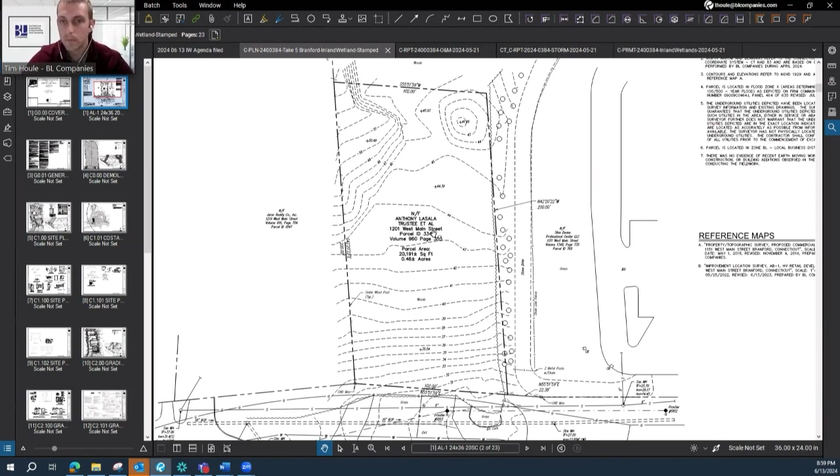However, from the record information we have, and the records that I'm sure are still on file with the town from the Aldi's and Chase development, we know that wetland is there. We know we fall within the upland review area. So that's the main reason why we are here.

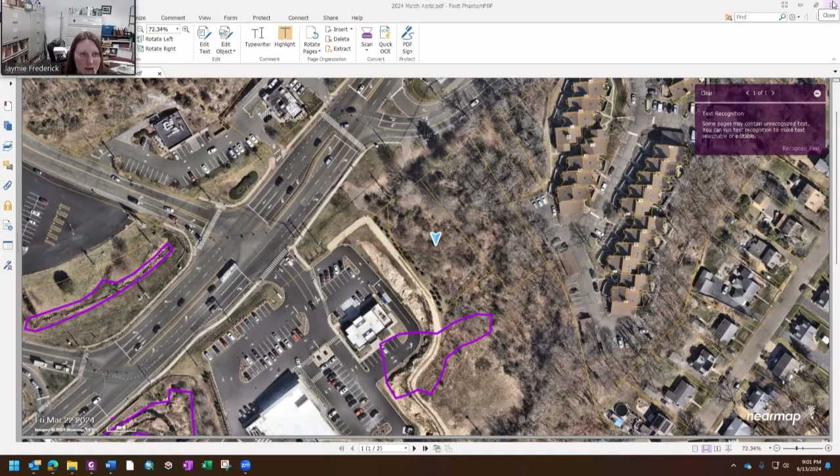Jaymie Frederick, the wetland agent: I'm sorry, I'm just going to quickly steal the show. I do have an aerial image that shows the approximate location of the offsite wetland in recent aerial imagery, so I think that might be helpful to share. It's showing the wetland before the approved wetland impact occurred, so obviously the wetland isn't this full extent anymore. It's approximately cut off where the road is. The blue arrow marks the subject site, and this is the location of the offsite wetland, which is within 100 feet of some of the proposed activity. Sorry, but I just thought I'd share that real quick. Yes, thank you Jaymie, floor is yours again.

Thank you, that's very helpful. Continuing on that, some of the information we had from the previous project showed the wetland in this area was primarily man-made. This whole area was heavily modified through rock removal — I don't want to say mining operations, but gravel harvesting and things of that nature. The consensus of the wetland scientists back in the 2019-2020 timeframe, when this process started for the Aldi's and Chase Bank, was that the wetland was really a result of the man-made impacts from those historical operations. It doesn't have high value, but it's certainly there. It exists, it was a regulated area, and a permit was obtained for the Aldi's and Chase. So we're here to follow the same path and appear before you all for work within the upland review area for this development.

So with that, I will quickly screen share again and jump to the proposed plan now.

As mentioned in the notice, the proposed project is a drive-through oil change facility, approximately 1,700 square feet. This is a quick summary of this use — it's fairly new to the Connecticut market. Essentially, the chief competitors of this style facility would be like a Midas or a Jiffy Lube. However, the big differentiation here is that visitors stay in their car the whole time when they come in.

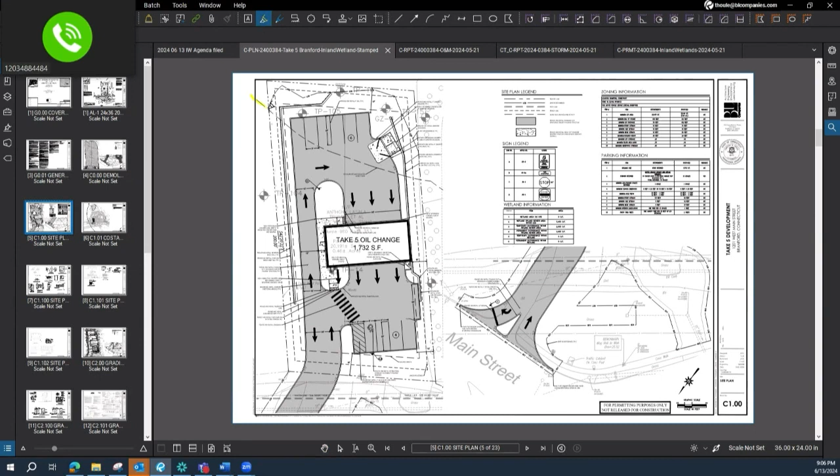The one item I'd like to point out is the estimated upland review area, or regulated area, highlighted in yellow. We took that from the historical plans from the Aldi's and Chase development, so it's pretty close to what was approved previously. The regulated area clips approximately a quarter to a third of the site in the back. The building is outside of that area, so the principal use with the oil change area is outside of it.

The building itself, and the development as a whole, complies with all zoning requirements. We exceed all the setbacks except for the side building setback, where we're right on it. We're really penned in widthwise, so we had to be right on the side setback on this side to get the circulation to work on the plan left side.

Parking, we exceed all the requirements there as well. Impervious coverage, we're just under the maximum required, which is 60% — we're at 59%. Lot coverage is 25% max for building, and we're at 9%, so plenty of room there. Building height is 40 feet max, and we're at approximately 29 feet, so still well in compliance.

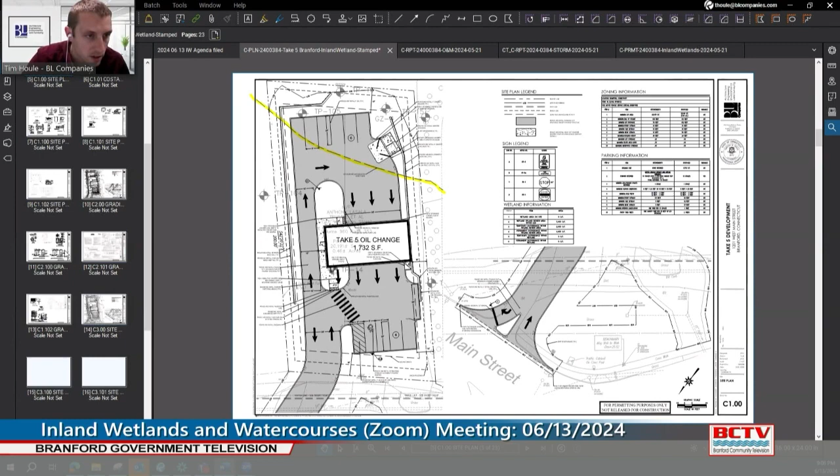This is a combined grading and drainage plan. I'll quickly step through grading first to lead into stormwater. As a whole, the existing portion of the site is higher in elevation. We're going to have a net cut in order to have safe driveway slopes up into the site.

We have retaining walls along the edge of the site, up in this area on the left side, and another retaining wall on the right-hand side. On the left-hand retaining wall, the site will be lower in elevation than the surrounding grade, so it's an exposed face looking into the site. On the right-hand side, the exposed face is plan right. The building pad area is higher in elevation than the Aldi's and Chase Bank site.

In the back of the site, we have a natural graded 3-to-1 slope. The off-site area to the rear is higher in elevation than our site, so we're a net cut there. We are down gradient of the wetland resource area.

From a stormwater perspective, what this all means is the site is pretty well self-contained. Essentially everything from the property lines in drains inward. There is a small drainage area off-site to the plan left that will sheet flow into the site, but it's really small — you can kind of see the edge of the change right in this area. So the site more or less functions as its own drainage area.

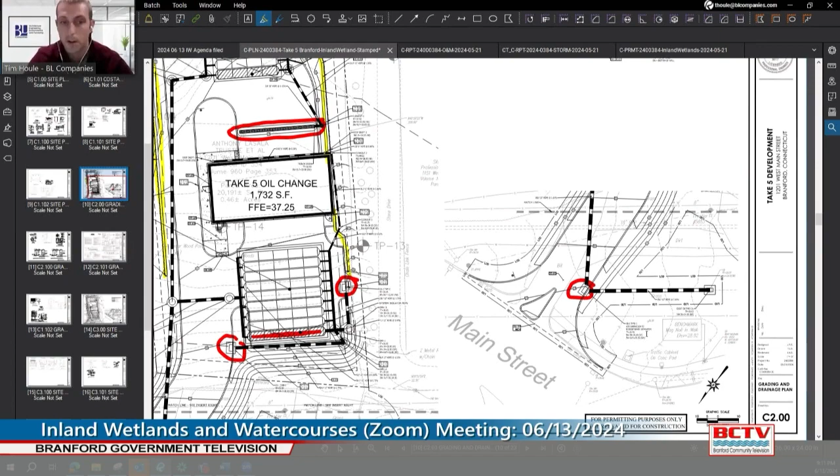The trench drain is connected from the drain into a clean-out at the end, and then flows into a similar subsurface retention system with an isolator row for treatment at the beginning portion, and the two remaining rows are the retention volume area.

Both of these systems are sized assuming zero infiltration at this point. We do have some test pit locations from the historical explorations done on site. We have a mixed bag of information throughout, so it's our expectation to do pre-construction test pits and infiltration testing to see if we can achieve any infiltration. However, for a more conservative design, we assumed no infiltration.

Stormwater will be retained in both of these systems through outlet control structures, highlighted in orange. They're the manhole immediately downstream of both systems. The intention is, through a series of weirs and orifices in that structure, to hold back as much water as we can to slowly meter out the flow so that we balance the pre-development and post-development discharge rates, which we did achieve a net reduction through all design storms using this method.

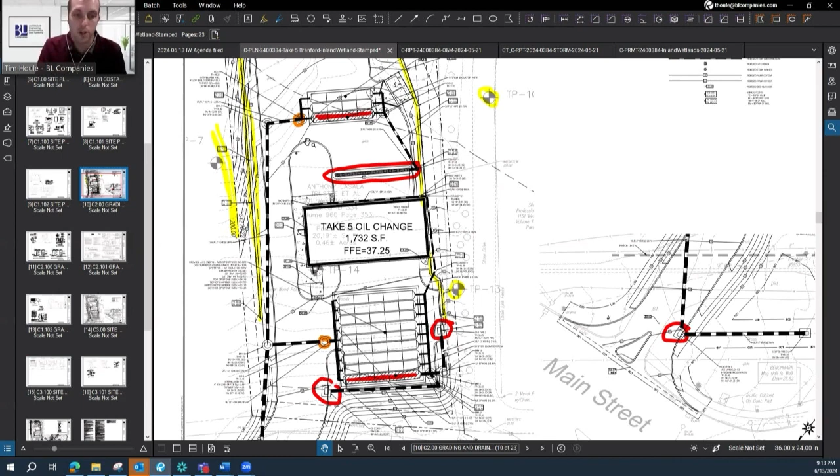Regarding infiltration, what happens in an overflow condition? In large storm events, especially if they exceed a 100-year storm, both structures have overflow weirs built into them. There's essentially a wall inside the structure that doesn't go all the way up to the rim elevation. In really large storm events, water will back up into the stormwater chambers, and as it exceeds that overflow weir height, it'll flow out through the storm piping into the DOT system.

Where do the roof drains on the building go? They're along the back side of the building here. They're piped around and come into the front underground system for storage, slowly being released out to the DOT system.

Commissioner Begeman: You have a place right now that has trees and things growing on it, which suggests there's some water retained in the soil. Then you put pavement on it and add catch basins that don't infiltrate, and you reduce the runoff somehow. I don't understand how that makes sense.

Yes, so we're reducing the peak flow rate of runoff. In terms of volume in this circumstance, assuming no infiltration, the volume of runoff will increase—there's no way around that. But the regulations indicate that we need to balance the peak discharge rates, not necessarily the volumes. Like I mentioned before, we do intend to do test pits prior to construction.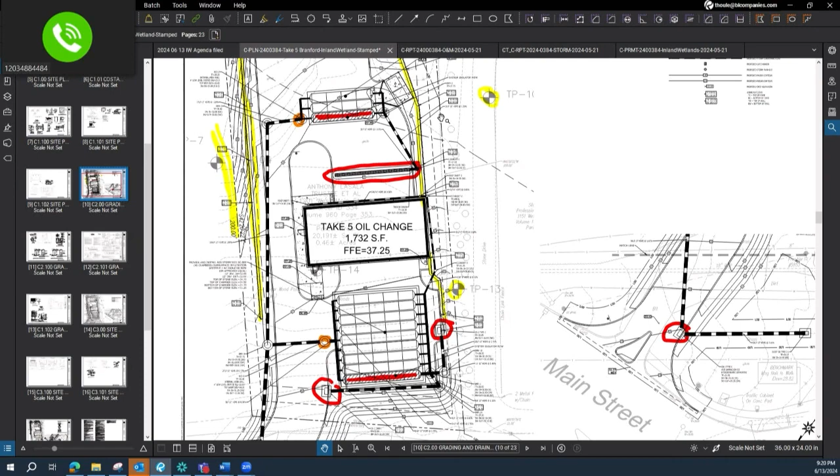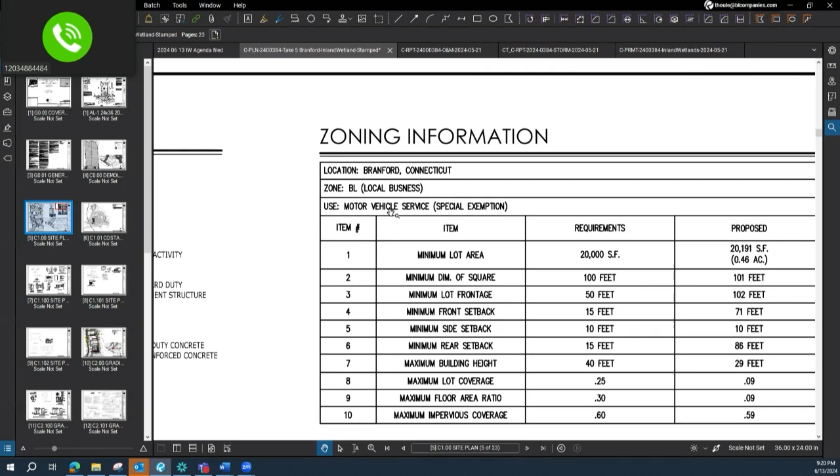Do you happen to know the original use of that particular parcel of land? My recollection is that there was a residential home on that property at one time. So the zoning has been changed to commercial, local business now. And the motor vehicle drive-through service doesn't quite fit within the motor vehicle service definition and zoning. That's the closest use, and it's allowed via special exemption here. All right, thank you.

Commissioner Bassermann: why is there no infiltration anticipated on this site? Some of the test pit results we got from the historical explorations between this site and the Aldi's and Chase next door show that there's clay mixed throughout. It was very sporadic, with one test pit having zero infiltration, less than 50 feet apart from another with acceptable infiltration of 2 to 3 inches per hour. So it's really sporadic and really warrants testing in the exact location that the systems are proposed.

Jaymie Frederick, Inland Wetland Agent: if staff review or the town engineer suggests that test pits be conducted, does the commission have any issue with that work commencing during the review process if they can get it scheduled? Commissioner Bassermann: I think it would be preferred, and the commission has requested it before, so it wouldn't be out of line. The idea that we have an opportunity to get a better sense of the site in terms of retaining appropriate stormwater and understanding the ground is clearly within the purview of our review. I'd hate to think we go forward and then have to make amendments after the fact based on test pits we didn't do now but did later.

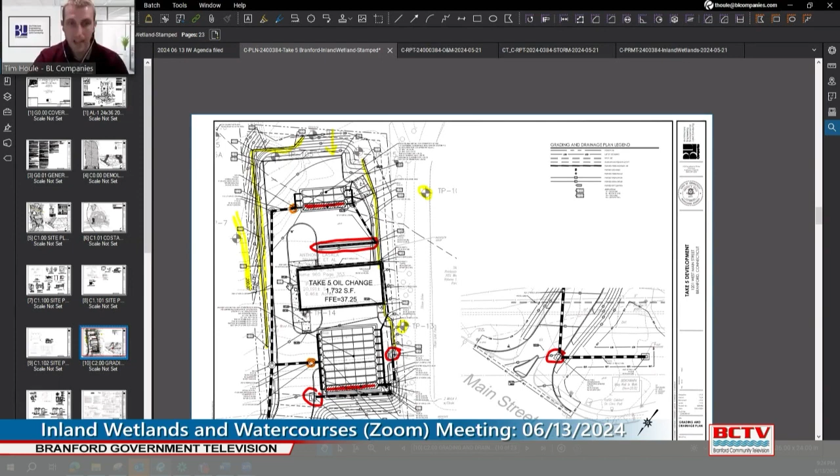So just quickly in closing, I'd like to summarize by saying we do have a comprehensive stormwater system. I do hear the comments on test pits and will certainly bring that back up with our project team. As a whole, we feel pretty comfortable with the minimal impacts this will have on the wetland resource area offsite. We are down gradient by quite a bit, actually, so there's very little likelihood any impact from the proposed development will work its way back toward the wetland area. Even the work we're doing within the regulated area is relatively minor in nature, with grading and parking installation.

As a whole, we feel this is a valuable development addition to the town, and I'd be glad to hear any comments that you have. Certainly we can address those in conjunction with test pits and receiving a final staff memo, as well as receiving comments from engineering. We'd like to address those all in one pass and then come back before you for our next opportunity.

Jaymie Frederick, the wetland agent: I do have one more comment, kind of just overall.

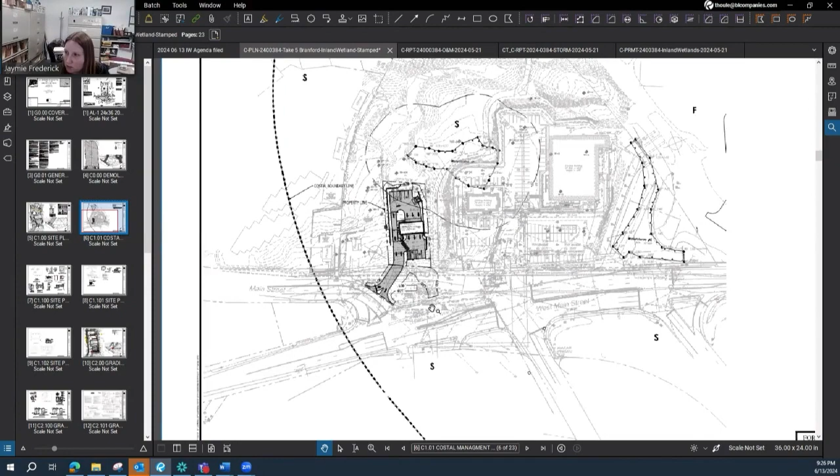I do agree the site appears to be graded so that drainage and whatnot would go away from that wetland, which the subject proposal is within 100 feet of. For clarification, I know the stormwater ultimately goes into the state drainage system in the Route 1 corridor. Looking at the coastal management plan, it appears to me that drainage would ultimately go to Mill Creek, or Watercourse 2. Do you know if that's in fact where the stormwater is conveyed to? I will have to double check on that, but I believe you are correct.

So I just wanted to put that in context for the commission. Commissioner Bassermann: was that the issue we had with the Aldi site, Jamie?

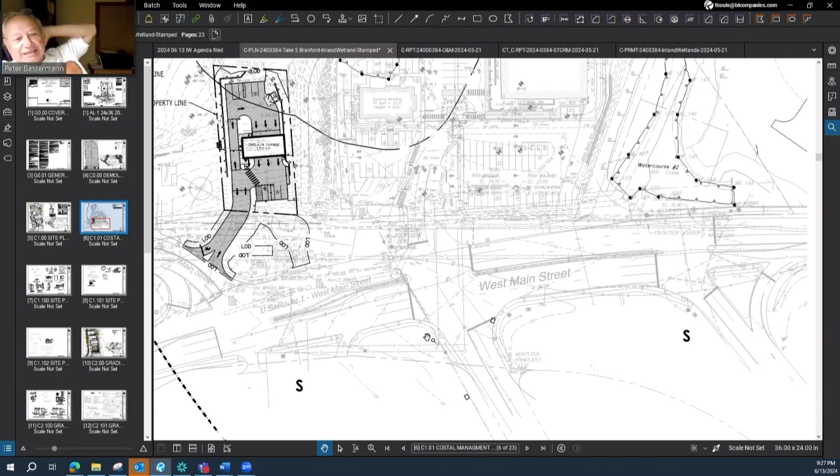Well, I think that's a super simplistic statement that I don't know how to address. It's the area to the right, I think that's water, it was part of the Aldi project. I wouldn't say it was the issue, but it was an issue. Yeah, no, I didn't mean to emphasize that. Okay, got it.

I think it's important — if we're somewhat outside the norm in terms of stormwater management treatment because of the nature of the soils where the activity is taking place — we're going to need to be able to say that we obviated the norm because of the following reasons and conditions. It's got to be something that doesn't become precedent for the next applicant looking to avoid infiltrating a site for whatever reason. So the evidence needs to be present and substantial as to why we don't follow the norm.

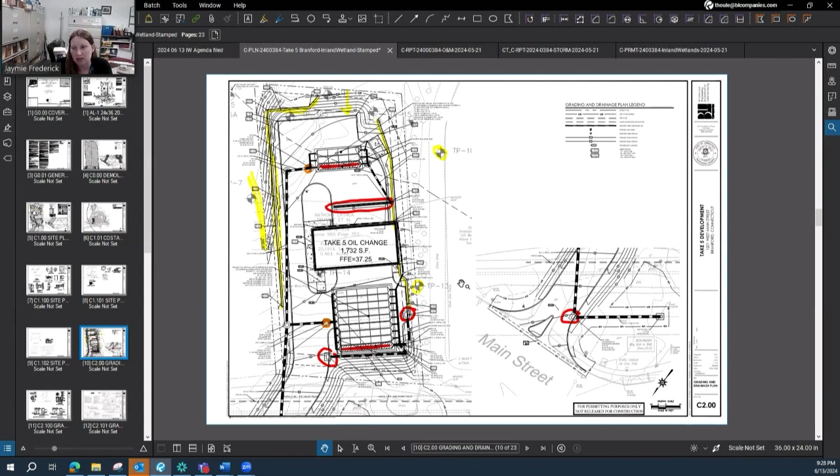Jaymie Frederick, the wetland agent: There has been public interest in the past when water being conveyed to Mill Creek is part of an application, because it is a very flashy watercourse. So I think consideration of making sure whatever on-site management can be provided, particularly regarding retention, is important.

Commissioner Bassermann: Is this something that would be available — at least a plan for what's to happen next — at our next meeting on the 27th of June? I think by then we can have a plan of where we would like to perform test pits, and ideally a schedule of when those can happen. It depends on scheduling with getting a contractor to the site. We may or may not have preliminary results by then, but at a minimum we should have more information on where those test pits would happen by the 27th.

Great. Anything else from the commission? I assume this, Commissioner Begemon — so next meeting we'll also talk about the planting plan.

I could actually bring that up now if you'd like. We do have a full landscape plan here. Essentially we took largely a zoning-based approach; however, the big driver here — we have a couple of street trees to meet the regulations, and one shade tree for the parking area, some more ornamental perennials and small shrubs around the building. The big note is we have a pretty extensive perimeter landscape screening all the way around the project perimeter. It all falls within the site but stays within the limit of disturbance. It's primarily a mix of American holly and eastern red cedar to provide a visual barrier to the other sites, but both species also have value to wildlife — those are the species that ring the site around the outside.

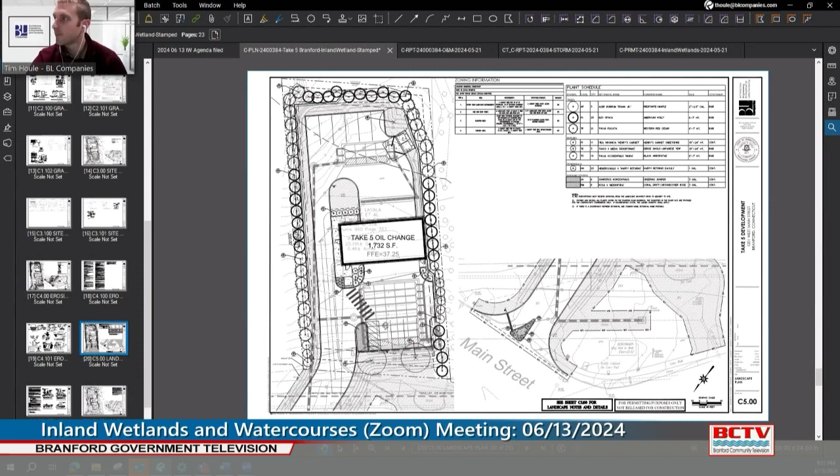Got it. All right, number 5, enforcement again. We have a notice of violation on 142 Chestnut Street, the removal of vegetation and earthwork without a permit to conduct regulated activities. And I know this has been back and forth in terms of information requested and received. Where are we at currently, Jamie, on this?

Jaymie Frederick, the wetland agent: a report has been received that addresses some restoration-type measures. It identifies wetland limits on the property and provides some recommendations for consideration.

So I think it would make sense, since we've got the soil scientist present, for him to walk through that report, and then maybe I'll reserve my recommendations and thoughts until after the commission has reviewed the report and asked questions, unless anyone wants something different.

Commissioner Begeman: Can I just make sure the new road that was constructed gets mentioned as you go through the report? If I was reading the right report, it says there was a new road, or I was reading an old report. Anyhow, Matt can talk about it.

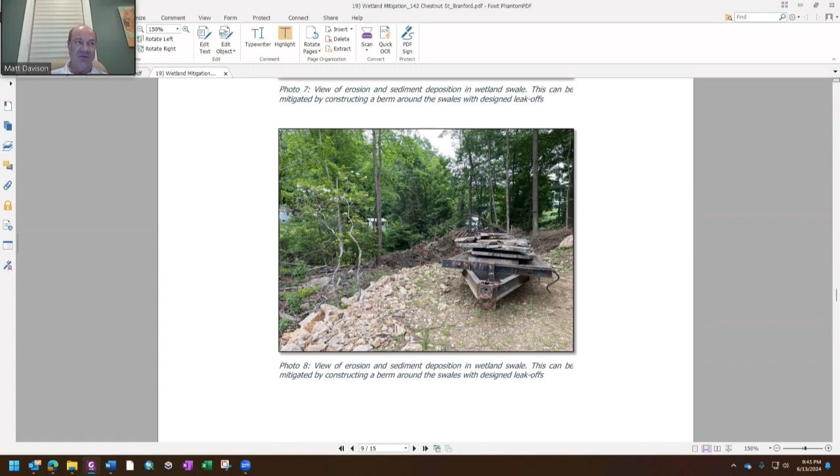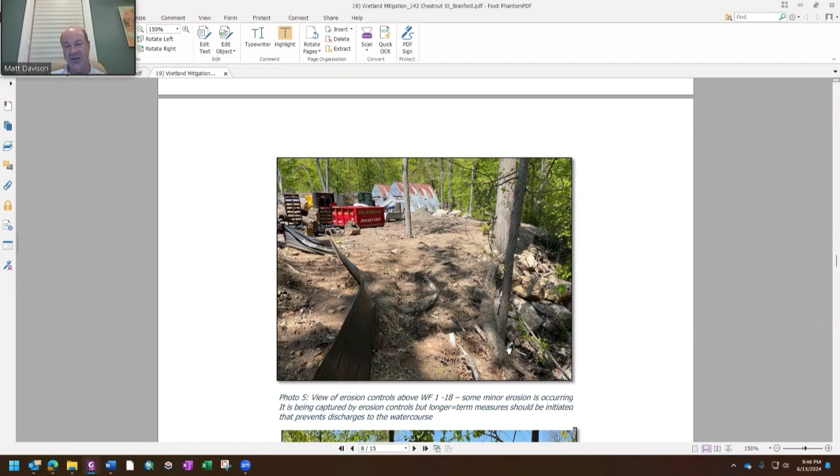The other parts of area 2 we were looking to address: it's an earth and gravel area that is eroding, specifically in one area along the soil stockpile. The soil stockpile area is to your left, the watercourse is to your right. The water is working its way down alongside this silt fence, and this is the area where we were looking to install a stormwater structure—a larger, linear feature using larger stone that would capture the runoff from the surrounding area and discharge it.

Right there, what we're proposing is to create a buffer. Where you were looking at that photo of the stockpile, we would create a buffer to the rear of that, which would be a no-build area, blocked off and landscaped. The stormwater feature would be to the left, creating a barrier because there's a steep slope on the right-hand side that drops down.

Based on what's going on there now, that area would likely become some type of storage area if you didn't block it off. The other thing we discussed is that the soil stockpile is on the wetland or stream side of this opening. The landowner said they're working through the soil stockpile now, and when done, they wouldn't put anything back there. We didn't provide a timeline, and we may need to. But basically, get rid of what's there now, and if there's another soil stockpile, it would have to be on the left-hand side of the opening, not the right.

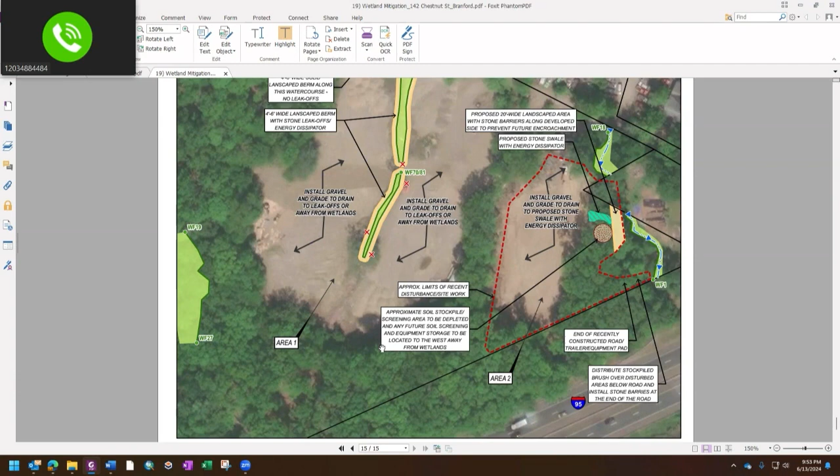This Commissioner Bassman. The other thing is that I don't think we want to find ourselves in the same situation as we found ourselves with an item that we struggled with for over a year, and that is there are definite activities that have to be done here, right? Have to be corrected, and we have more enforcement power, I guess, if you will, or control, if we issue a cease and correct, as opposed to getting an application to resolve these issues. So I think let's take the bull by the horns and move forward with the cease and correct. I guess that's part of my logic.

Yeah, Jamie Frederick, the Wetland agent. So I think at this point, this has kind of moved away from a notice violation. As you said, there's theoretically items that the commission wants to see addressed to resolve the activity that has occurred. And it's activity the commission wants to see addressed. And it sounds like the owner is looking to help go through the process. But it's not activity that they necessarily want to do. So a permit wouldn't necessarily be the right vehicle.

And then kind of general guidance on the violation process is if there's activity the commission is requiring somebody to do, that is an order. So I think the order doesn't need to be a contentious process. It just outlines what is required in the time frame. It gives the owner opportunity to express concerns and have discussion with the commission, and the commission can make a decision after that show cause hearing.

So I guess the first two questions would be, does the commission feel like generally the information you're looking to see to resolve the violation has been submitted, or is there additional information that you think is necessary? Do you think a formal site plan is required, or do you think what we have here is perhaps enough with a cease and correct order and timeframes and oversight from a PE potentially sufficient?